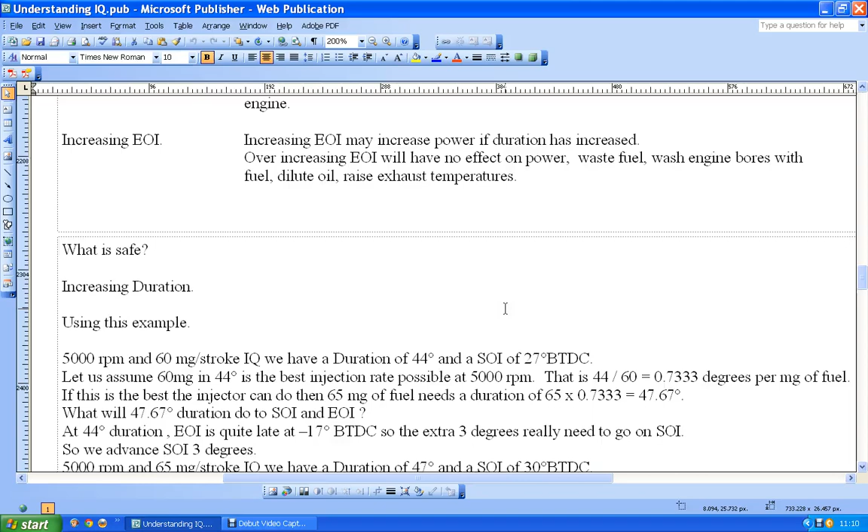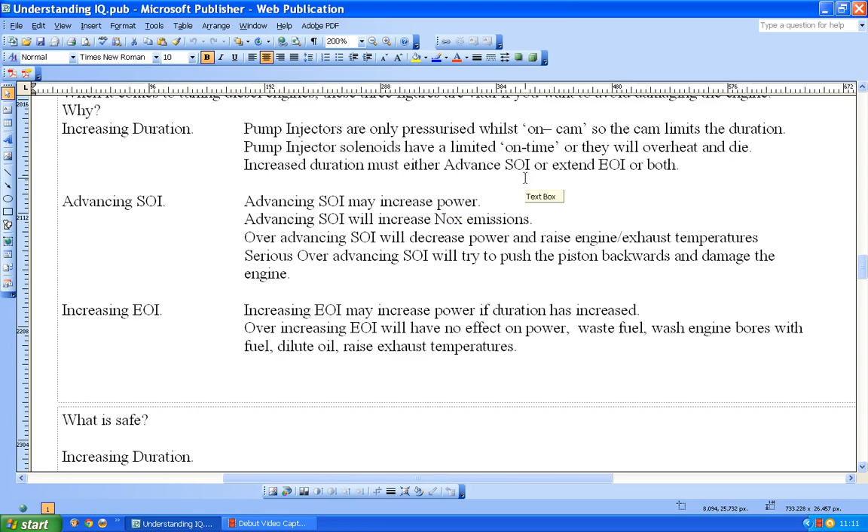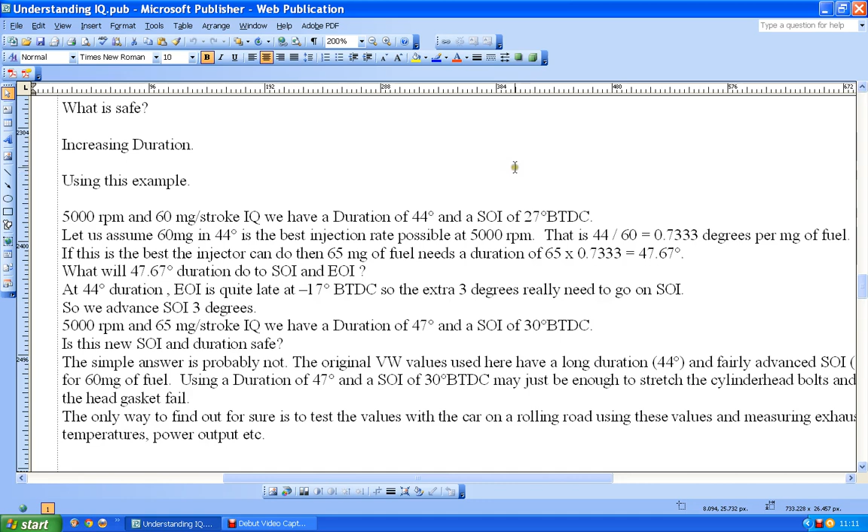Okay, in the last video in this little series of looking at injection quantity and what's going on with duration and start of injection, I looked at what might be possible, but what the advantages or disadvantages of that might be. Now, here I'm just going to look at what happens then if we actually make a calculation and we make some real changes. And I'm going to propose the same changes that if you look at the video that I made about duration, you will see the same sort of comments there, but in a slightly different format.

And that again uses figures from the Seat Leon 1.9 EDC16 105 brake horsepower. Now this engine uses fairly small injectors, depending on how you want to define small, but smaller than more powerful engines. So if we look at 5,000 revs per minute, 60 milligrams per stroke injection quantity, duration 44 degrees, SOI 27 before top dead centre. Those figures are taken straight off of the files. So I haven't made them up, they're just straight from that file.

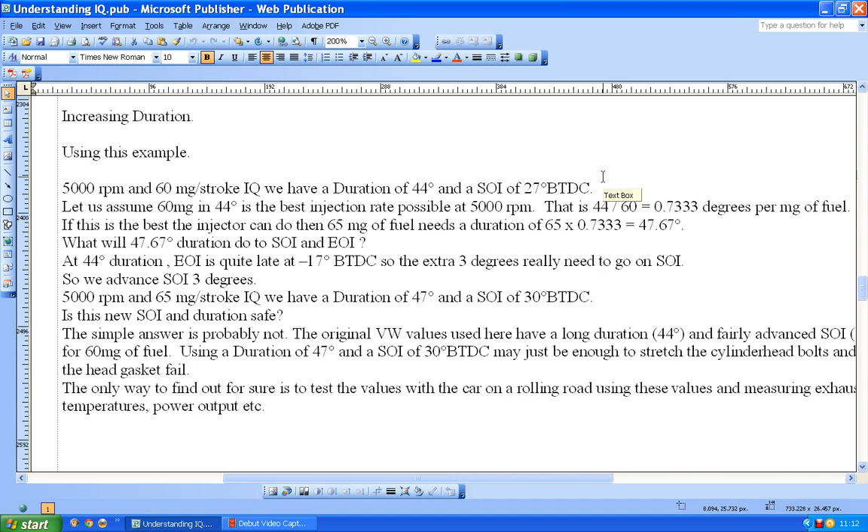Right, now let's make an assumption that we are flat out at that point. So in other words, let's make an assumption that the designers looked at this and they said, right, foot to the floorboards, maximum 60 milligrams, 44 degrees, is the amount of time it's going to take, 5,000 revs is the engine revs that you're going to get at that point. This is the best you're going to do. So in other words, you can't have any more fuel.

Now, the thing is are you being limited because the designers just thought, no, we're not going to let you have any more? Or are you being limited because that's it? The injector can't give you any more fuel, so if the injector can't give you any more fuel, you can't really have any more, can you? And I don't mean in total, I mean in any given amount of time, because this is all about time. So okay, let's have a look at that for this amount of time.

So let's say to ourselves, okay, we've got 44 degrees and 60 milligrams. So that means that we will end up with, if we divide the two, 44 divided by 60, 0.73, I'll ignore the rest, 0.73 degrees per milligram of fuel. So I need 0.73 degrees to inject a milligram of fuel. Now, if I say to myself, this is the best, so in other words, I'll put it there, if this is the best, then what happens if I want to inject 65 milligrams?

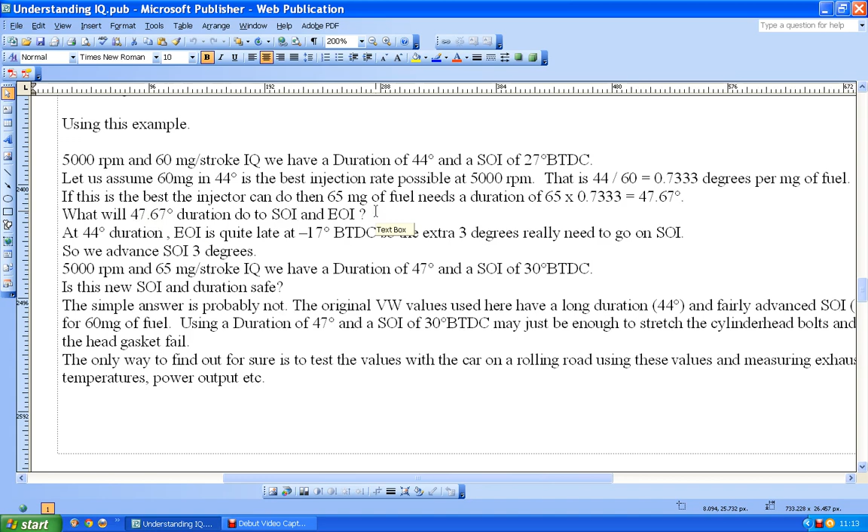Well, I just multiply 65 by 0.73 is what I do. So I times 65 by 0.73, and I end up with 47.67 degrees. So I've now got a duration of 47.67 degrees. What's that going to do to my start of injection and end of injection? Well, at 44 degrees, end of injection is minus 17 degrees.

So I haven't really got room to play with here, have I? Because, and I guess the designers would have taken this into account with the files anyway, but I can't very well stick 3 degrees on the end of there. And I don't really have the option to do that anyway, because there are no maps which allow me to play with end of injection. So I can't stick 3 degrees on the end of there, so I've got no real choice.

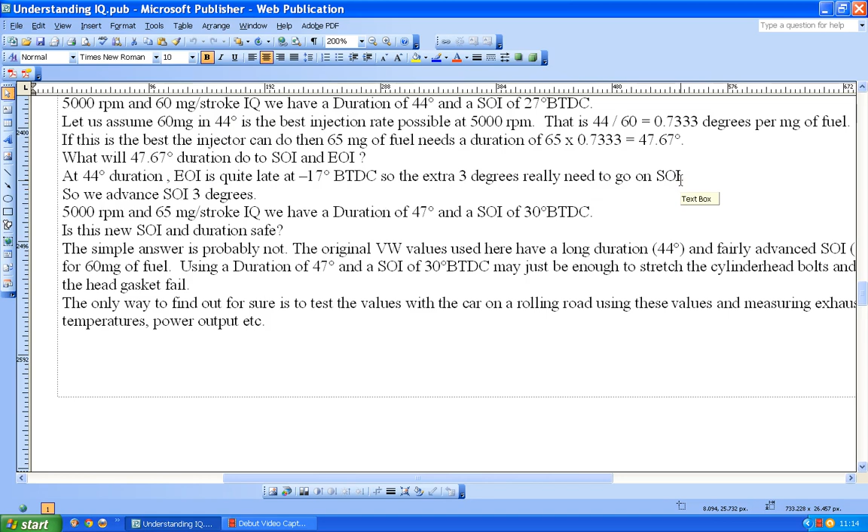This is going to automatically advance the start of injection 3 degrees whether I want it to or not. So I might as well go and make an allowance for it so that it can start 3 degrees earlier, because I run the risk of it trying to do that regardless. It may not do it if there aren't any maps to allow it though, and there's always a problem with that. Some maps seem to allow modifications that seem to be outside the scope of the map and others don't. So you never know for sure until you try.

But let's assume that we know we've got to go for an extra 3 degrees, so we advance start of injection 3 degrees. So now we've got then 5,000 revs, 65 milligrams. It's going to take us 47 degrees roughly.

I've knocked the odd bit off the end, so it's going to take us roughly 47 degrees, and we need a start of injection time of 30 degrees. So is this safe? That's what I've written there. Is that safe? Is that okay? Well, one of the clues is to go and look at the limiter, because if the limiter is set at 30, then you can usually safely say to yourself, well, I might get away with 30 because the limiter's set at 30. So that's your first clue anyway.

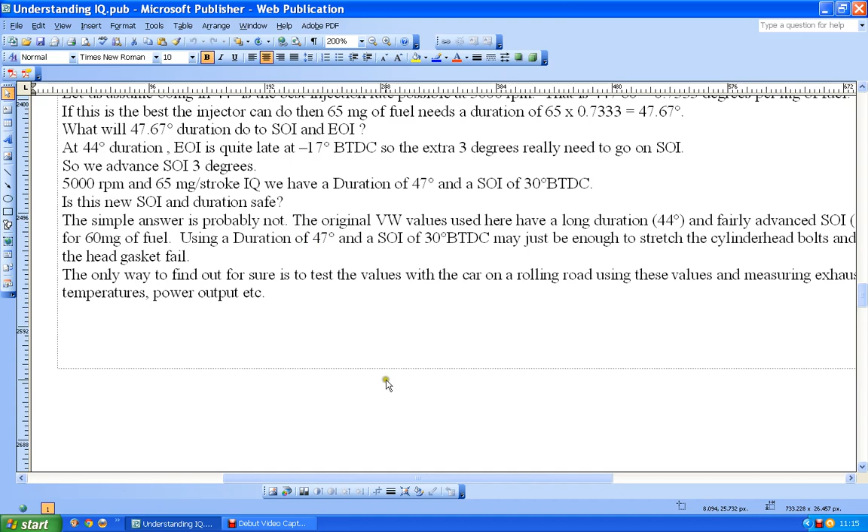As I've put here, the simple answer is it's probably not in terms of wrecking the engine, but it may well not be safe in terms of just ordinary everyday driving around, because if you constantly run around with this sort of change to your car, 99 times out of 100 you'll be fine, but then one day you may be cruising on the motorway and just have the right air temperature, engine temperature, fuel temperature, and all sorts of other bits and bobs all ticking away at the same point, which just allow things to tip the edge of the balance and do some damage to the engine.

And this does happen. People tune their engines, run around in them for ages and think, oh, this is great, and then suddenly, bang, something goes wrong. So it's worth bearing that in mind.

Now, as I've said here, the original value is 44 degrees and 27 degrees SOI for 60 milligrams of fuel. That's fairly big duration and a fairly large advance. So if you go to 47 degrees duration and 30 degrees before top dead centre, as I've just said, you might be just on the edge of where you might put pressure on the cylinder head bolts and maybe the cylinder head gasket.

Now at this point, it would be nice, wouldn't it, if you could watch these videos and get a magic answer. You know, this guy will tell me the answer to my problems, but there isn't an answer, because you will find someone on the internet who's perhaps done this and said it's great and I didn't have any problems, and you will probably not find someone who says, oh, I tried this and it blew the engine up, because they probably keep quiet.